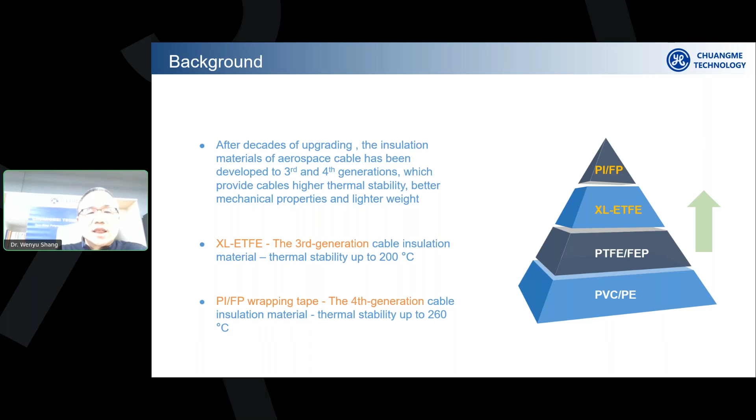The first solution we mentioned at the start of the presentation is the cross-linkable ETFE, for the third generation. The working mechanism is we take a specialized ETFE and compound it into a specialty formulation which contains ETFE as the base resin, plus the radiation cross-linking agent and other supporting agents, making the whole material radiation cross-linkable.

When it is extruded onto the wire to form a cable, the customer takes the material and co-extrudes it onto the copper wire core, then puts the cable in an E-beam electronic beam radiation machine to cross-link the insulation layer, finalizing the cable as a cross-linked ETFE communication cable.

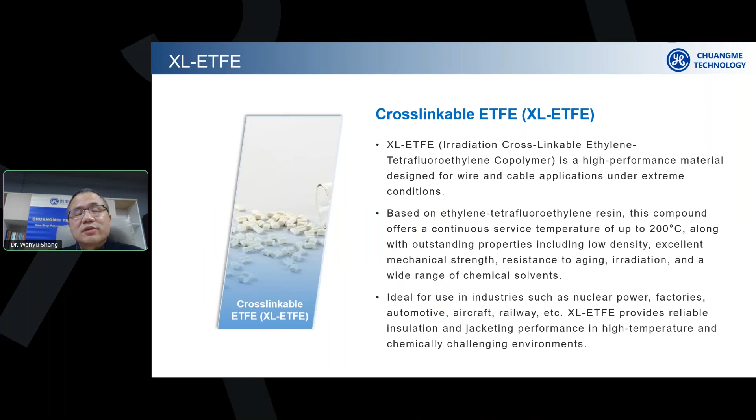Now this is a more detailed introduction of our existing products at Chuangme Technology. As I mentioned, we developed this material over the past decade or so. We completed the work and now have a very mature material available in the market for our customers, with many successful cases both in China and outside of China using the material to make XL-ETFE aerospace cables.

As you can see on the second line, I mentioned previously that this cable needs to sustain very low temperatures down to -60 degrees C, and very high temperatures up to 200 degrees C. This is a very wide temperature range the cable needs to work across on airplanes, missiles, rockets, and satellite-like applications.

On the last line of this page, you can see MIL-W 22759 and GJB 773, which are the industrial standards used in the United States and China. The US is no doubt the leading country in aerospace, while China is much smaller but catching up quickly and expanding the industry. These two countries more or less represent the highest industrial technical demand for this kind of application.

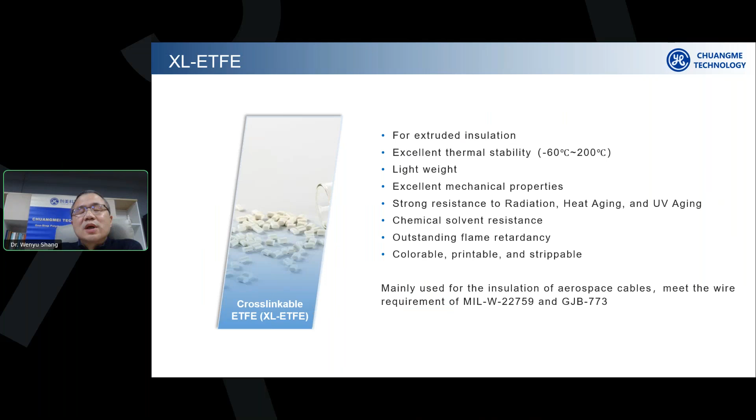We have full confidence that for anyone outside of China who wants to test our material, we're ready to provide our material and technical support to help you pass all these equivalent technical tests and trials.

Okay, so this is a typical customer performance testing report we had acquired in the past with one of our existing customers. What the data shows is that we want to pass the same information to the industry, that our XL-ETFE material is capable to fulfill the highest technical requirements from either China, US, or other countries' aerospace cable application demand.

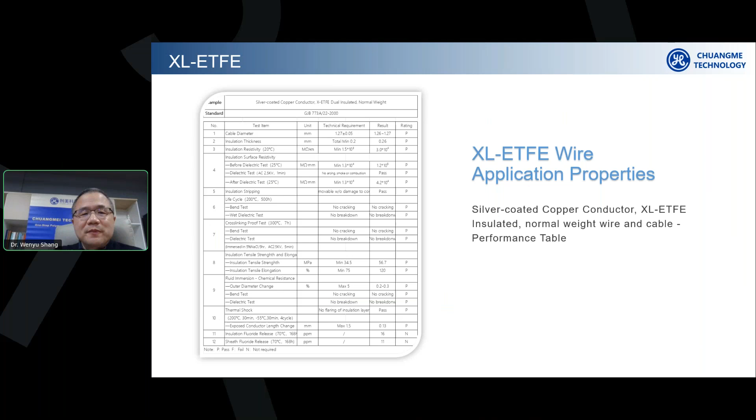Okay, now for the fourth generation - so the XL-ETFE is the third generation cable solution, right? So now we go into the fourth generation aerospace cable, communication cable demand. The first question you might ask is why we would still need the fourth generation. The third generation is very good, right?

So it can work up to 200 degrees C. But the most important factor is very simple: the airplane is getting even faster, flying even higher. So they demand even higher temperature. The third generation with XL-ETFE material can sustain 200 degrees C, but some of the communication cables on the plane demand even higher temperature, up to 260.

So that's 60 degrees C higher than the third generation. This is why the industry developed this polyimide composite wrapping tape solution. It's a very smart design for this fourth generation solution. If you imagine, we take ETFE and co-extrude it on the outer layer of the cable, cross-link it with electronic beam - there is a limit to it. Even shifting from ETFE to an even higher temperature resistance fluorine polymer, we can only increase the temperature resistance by another 10-20 degrees C.

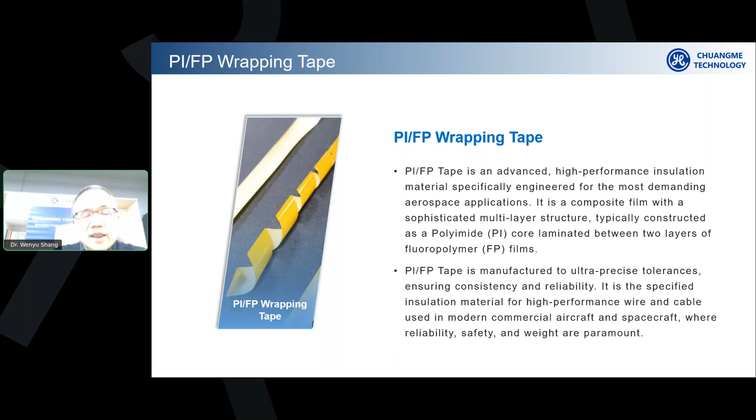At the same time, these two layers of fluorine polymer coating on both sides are contacting each other in the wrapping overlapping area, and they would melt and form a continuous insulation layer. So through this design, we can produce a high temperature resistant aerospace communication cable, and make the wire sustain a very high temperature working environment.

So just keep that wrapping and solidified insulation layer in mind, that we can call for the benefits from both PI and fluorine polymers, and then we can extend the temperature working range from -60 to 200 to a new range.

This new range expanded on both ends of the spectrum. On the lower end, we can push to an even lower temperature, from -60 to -65, an even colder working environment. On the high end side, we pushed up a whole 60 degree C range. This is the most important difference and benefit we can call for from the fourth generation insulation material and fourth generation aerospace cables.

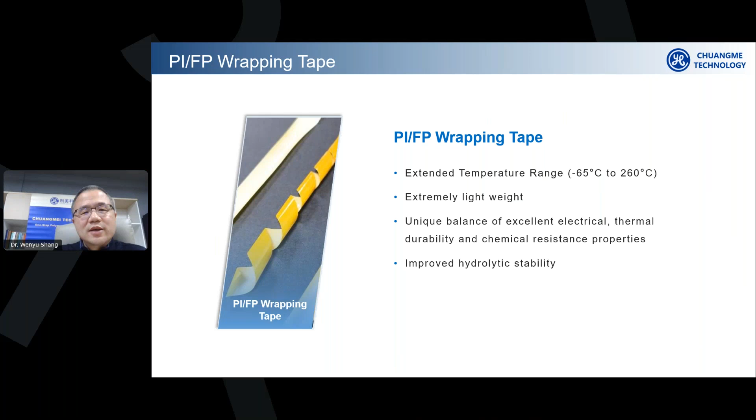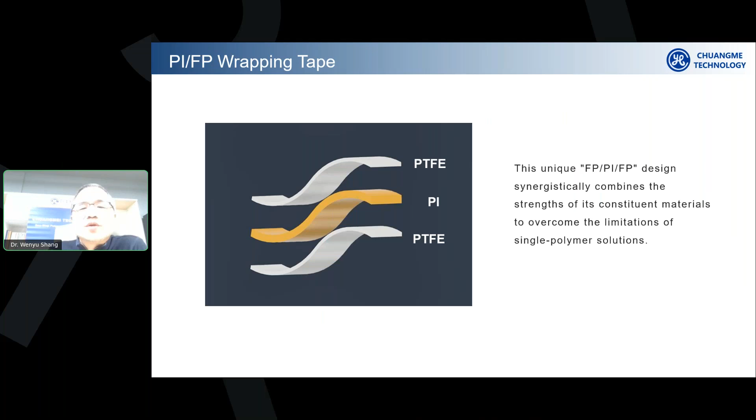Now this is the basic structure we formed with the PI/FP wrapping tape. Here is a picture, and you can see the PI sits in the middle, and we coat a specially modified PTFE coating on both sides of the polyimide film. The PI offers very high temperature resistance as a core performance, and these two PTFE sandwiching structural layers offer protection to the PI film, and would melt and form a continuous insulation layer in the final cable production procedure.

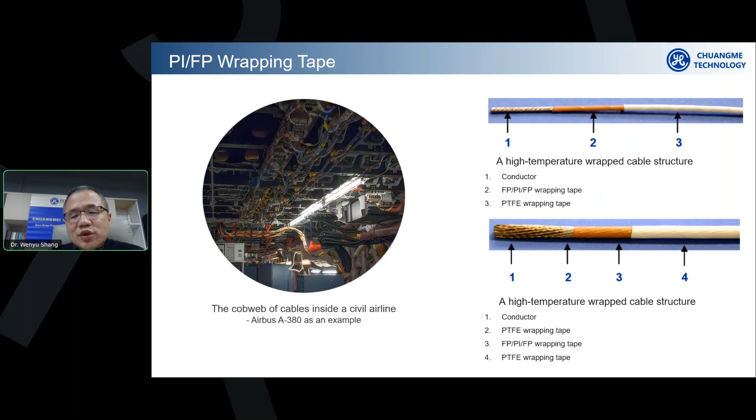After the cable is made with this structure, the whole cable is put through an oven with temperature between 350 degrees C to 400 degrees C, to make the second layer a fully continuous and non-cracking insulation layer, offering high temperature resistance performance.

So now let's see some performance data. As I said in one of the previous slides, we explained the high technical performance demand from airplanes, rockets, and satellites. Here are some actual numbers.

So the benchmark for the fourth generation PI/FP tape is the best product or the industrial standard product being used worldwide. Here are the technical performance of their tape, and our tape performs like the CM Tech, marked with CM Tech on the right-hand side. So we are confident to provide a product with equivalent performance compared with the best benchmarking products in the world, and offer it to our customers.

And we can confidently guarantee to our customers that we can pass the most stringent industrial standards, such as the 22759 or the 773B in China. The SAE standard is used in the US and some countries in Europe, and is a de facto world industry standard.

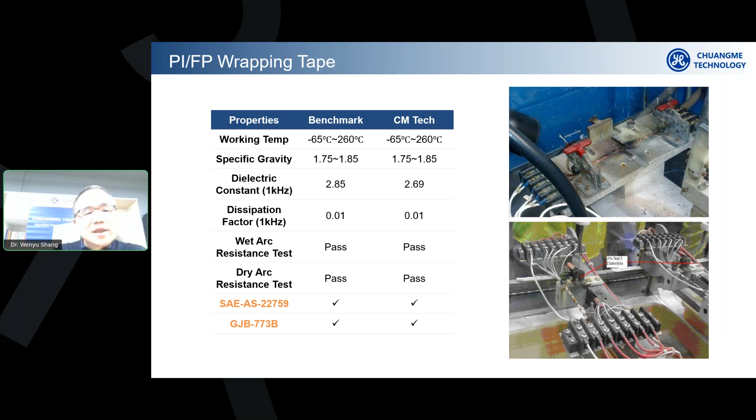So that is the most stringent standard we can find in this industry.

Okay, so here is a wrapping up discussion and comparison between the two generations. So we see the pyramid again, right? From bottom to top, that's the first, second, third, and fourth generation, based on the temperature resistance and performance demand. We have our interest in the third and fourth generation of these communication cables.

Here are some performance demands between the two generations. As you can see, the most important performance comparison is about the temperature rating. The third generation calls for 200 degrees C, and fourth generation calls for at least 260.

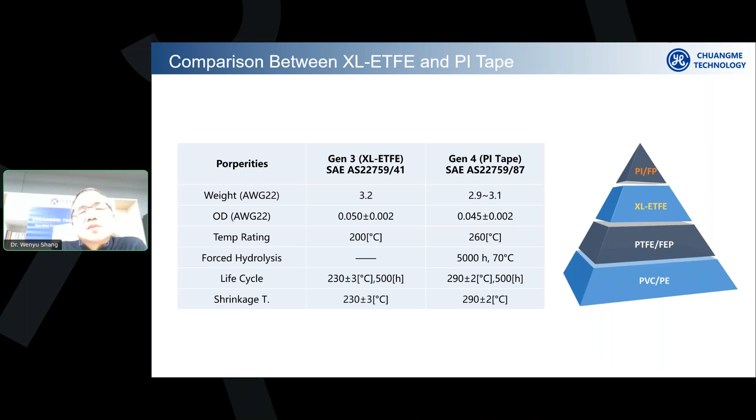There are some cables that call for 280 degrees C, but it's a very small application area in the industry. So it's 200 versus 260, and we can make both materials available at Chuangmei and offer them to our customers, and help our customers employ the material in their cable applications.

Okay, so back to the application. As said, aviation, spacecraft, maritime, and railway, high-speed railway are all potential customers, and we see our cable being used in all of these areas.

If any of you have interest to discuss the technology with us, and find out if you have some specialty technology demands from your specialty applications, like if you encounter a material that needs to sustain very high temperature, like what we explained here in the aerospace communication cable, just reach out to us. We can apply this technology together with you and find out the best solution for you.

And if you are already in this industry, making communication cables for airplanes or for space rockets, satellites, or similar applications, we are ready to work with you. We have both of these solutions ready at Chuangmei Technology. We can offer samples, technical support, discussion, all these products and services to you anytime you want. Just reach out to us and let us know the application background, so we can offer the best solutions for you.

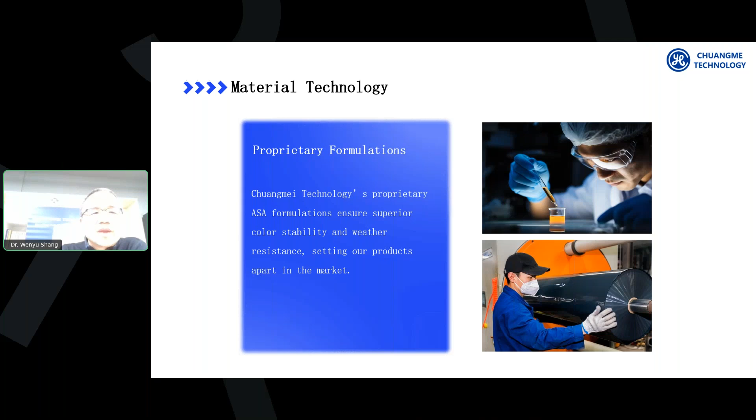Okay, we also have accumulated lots of experience with the related equipment - about how to make polymer materials, how to process materials, like the compounding machine, twin screw extruders, single screw extruders, or film production machines, sheet production machines, and other blow molding, injection molding machines. So we have a rich experience in those areas as well.

So if you need any consultation about the equipment, where to find the right equipment, how to set up your equipment, how to use the equipment to reach your goal, we are ready to provide the support and service to you as well. And in many of the cases, because we are a material company, so we sell material and material related services.

So we don't sell equipment, right? We have the knowledge, but we don't sell equipment ourselves. So we offer this kind of service for free as part of our value-add service to our customers in many cases.

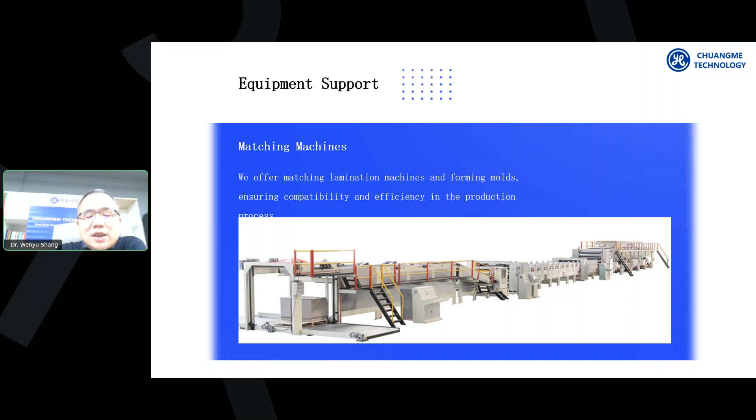Okay, customization capability, we already mentioned this multiple times. If you have a specialty demand, you have some difficulty in your application, you don't know how to deal with it, or you have some application but you don't know what material is the best one for it, or you have the material but you don't know how to use it in the best way, we can customize the solution for you.

So we can look into your case, pick the right polymers, and develop the right formulation and processing configuration windows, and we pick the right equipment for you, and customize the whole solution based on your specialty application demand. For integrated service, across equipment, material, and application areas, if you have any questions or demands, just reach out to us, and we'll find the best solution for you.

We are based in China, but we have a rich business operation experience beyond China as well. We have customers in the Middle East, Turkey, North Africa, Europe, North America, South America, pretty much around the globe. We have many customers in many countries, and we love to work with you guys. Whatever application demand, whatever specialty applications, just reach out to us and we'll work with you on those.

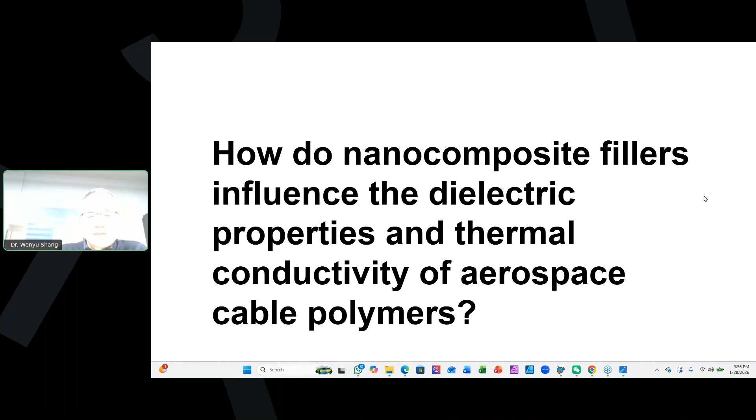Very good question again. The major challenge for FR grade polymer for aerospace cable can be summarized in two aspects. First, exactly as you said, you don't want to add a lot of additional weight for the cable, because every ounce of weight is precious for making an airplane, rocket, or satellite. So you don't want to use a large amount of inorganic FR additive or filler into the compound to add weight.

That is one constraint. The second is that in aerospace, the smoke density demand for wiring cable is very stringent. You don't want any additional smoke being introduced into the airplane cabin when it's exposed to fire. These two factors combined rule out lots of usual FR solutions, like large amounts of inorganic fillers used as FR agents, which usually is not applicable for aerospace cables. You have to choose very good

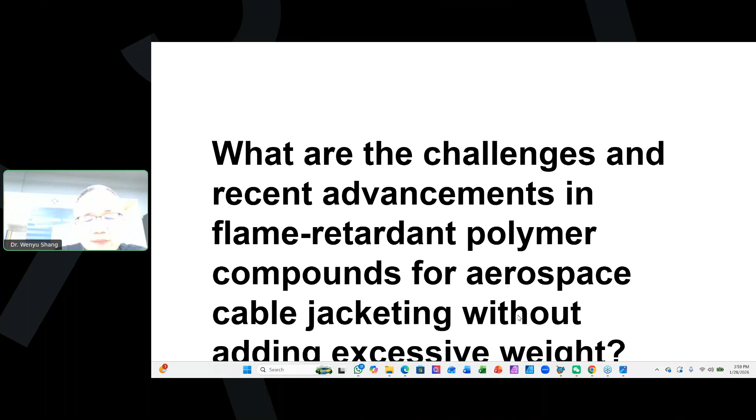This is a straightforward question based on industrial standards - SAE 22759 or the Chinese standard GJB 773B. These standards have very specific design ranges for the conductor size and for the outer diameter size of the cable. When these two diameters are decided, the wall thickness by default falls into a range. So there is a narrow range you need to have your insulation wall made for a certain cable. There are around 30 different calibers for the cables, each with a narrow range of insulation wall thickness.

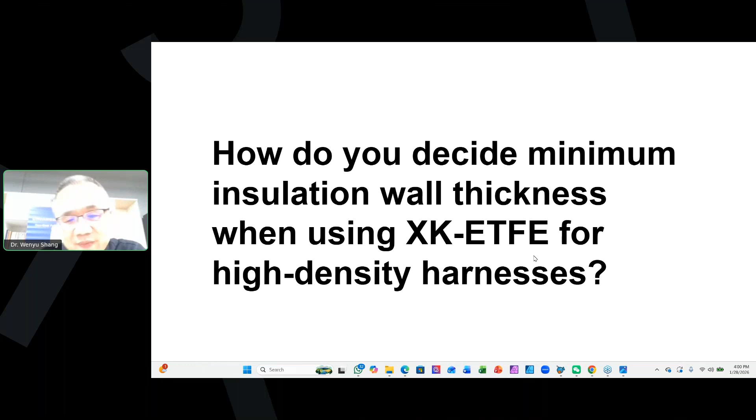What visual signs indicate aging or degradation of XL-ETFE insulation during aircraft inspection? This is a very good question. There are several visual signs when you inspect the cable.

The first one is micro cracks. Especially since an airplane has a very tight inner space, the cable, when deployed inside that space, needs to go through some bizarre ways to connect the sensor or engine to the control center. It inevitably needs to pass some very sharp edges and sharp angles, and at certain points needs to go through a very small radius turning point. This is usually where the cable sustains the highest stress level, and over long working time, it's one of the reasons causing micro cracks in the insulation material, subsequently causing working failure of the communication cable. So when you inspect a long-working-time cable, micro cracks or even large cracks are one of the first